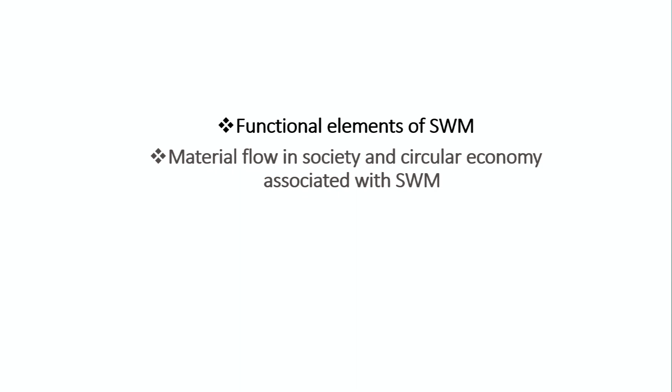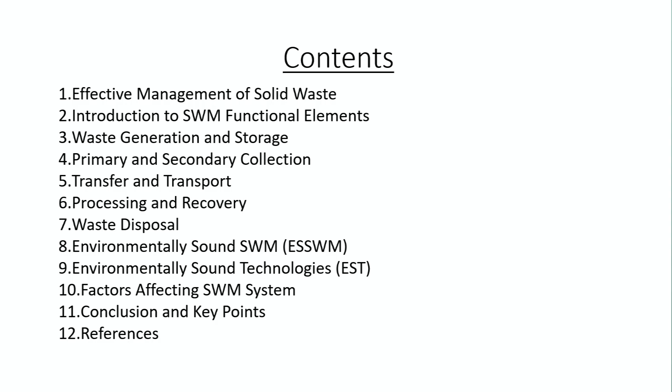Welcome to lecture 1 of week 3 of the SWM course. In week 3, I will cover two aspects: first, functional aspects and elements of solid waste management, and second, material flow in society and circular economy associated with solid waste management. In lecture 1, I will cover the functional aspect of solid waste management. These are the contents taken under this lecture.

First is effective management of solid waste. Effective solid waste management is needed to ensure better human health and safety. It must be safe for workers and safeguard public health by preventing the spread of diseases. In addition, an effective system of solid waste management must be both economically sound and sustainable. Environmentally sustainable means it must reduce as much as possible the environmental impact of waste management, and economically sound means it must operate at a cost acceptable to the community.

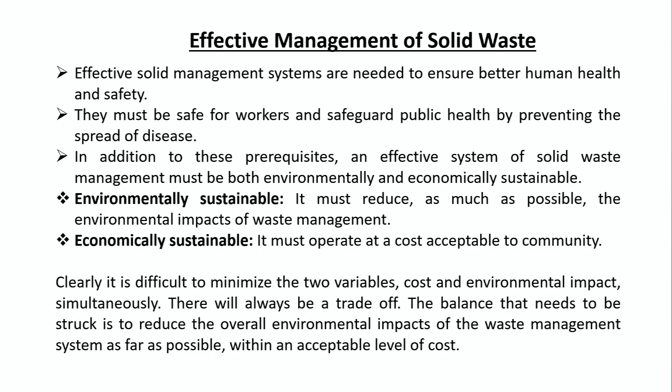Clearly, it is difficult to minimize the two variables, cost and environmental impact, simultaneously. There will always be a trade-off. The balance that needs to be struck is to reduce the overall environmental impact of the waste management system as far as possible with an acceptable level of cost. An economically and environmentally sustainable solid waste management system is effective if it follows an integrated approach, that is, it deals with all types of solid waste material and all sources of solid waste.

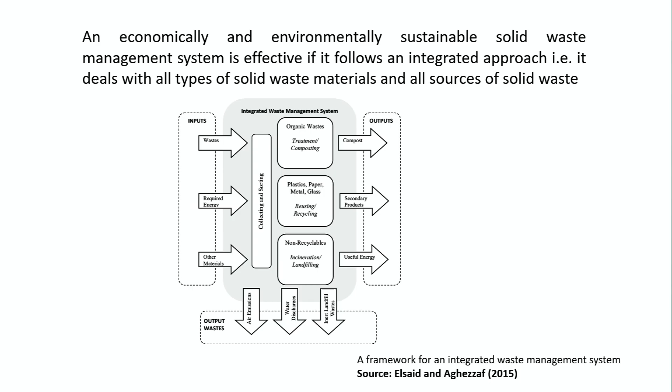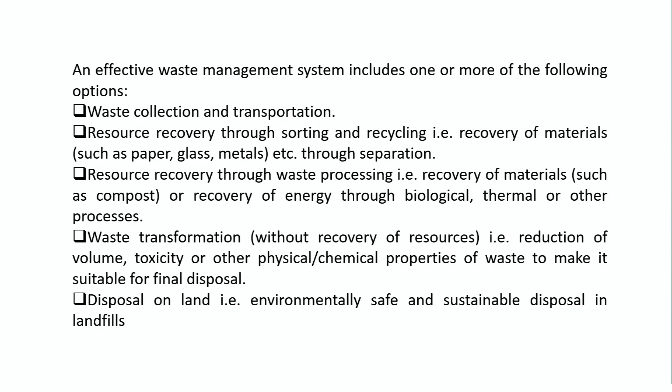An effective waste management system includes one or more of the following options: waste collection and transportation, resource recovery through sorting and recycling, through separation, resource recovery through waste processing - that is recovery of material or recovery of energy through biological, thermal or other processes - waste transformation, reduction of volume, toxicity or other physicochemical properties of waste to make it suitable for final disposal, and the last is disposal on land.

The waste management systems which are self-reliant and self-capable can sustain for long. This figure shows a representation of expected financial flow in a sustainable waste management system, where the output such as secondary products, compost and useful energy are generated, which result in revenue generation, and the input are fixed cost, operating cost or transportation cost. There is initial investment also involved as the input cost, and sometimes citizens pay for this collection or management of waste. So there should be a cycle so that whatever waste management system is followed should sustain for a long duration.

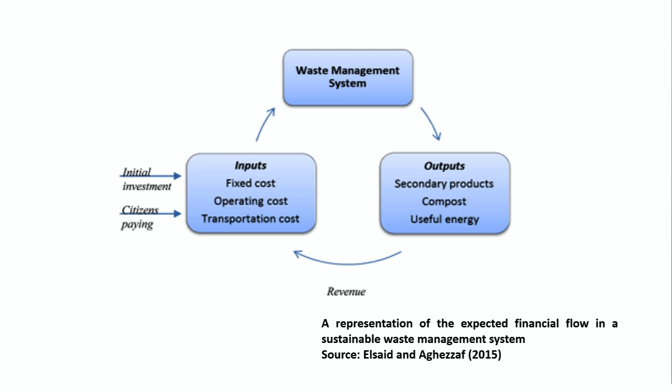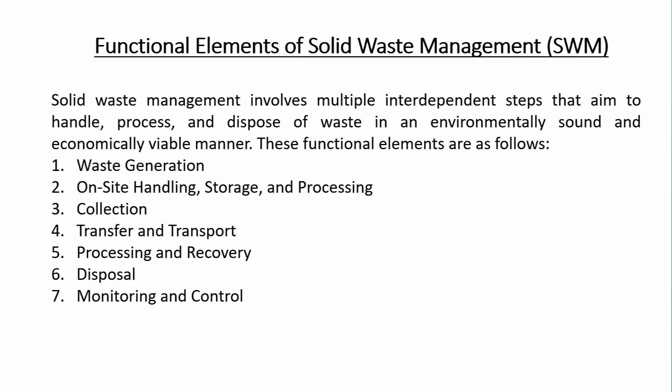Now, the functional elements of solid waste management. Solid waste management involves multiple interdependent steps that aim to handle, process and dispose of waste in an environmentally sound and economically viable manner. These functional elements are as follows: first is waste generation, second on-site handling, storage and processing, third is collection, fourth transfer and transport, processing and recovery, then disposal, and also the monitoring and control of the whole process is important.

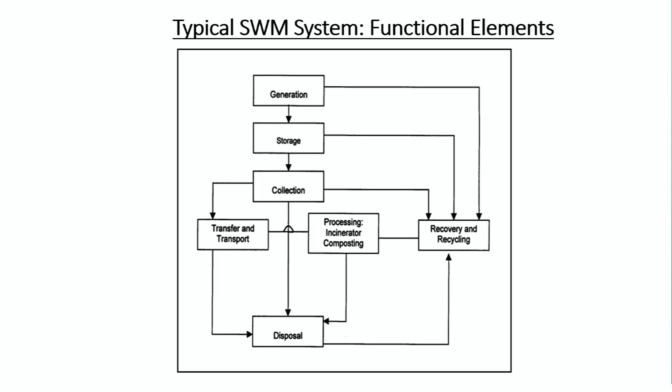This shows the flow diagram of a typical solid waste management system, function element wise. So there is generation; it may be either stored or sent to resource and recovery and recycling. Stored items are further collected to a secondary collection point, and from there it is either transported to a disposal point, or resource recovery and recycling is done. Then there is processing through incinerator or composting process, and whatever is leftover is finally disposed of. So there is an integrated approach.

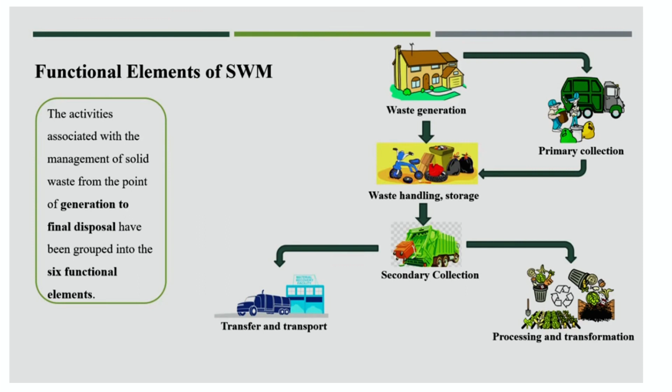The functional elements of solid waste management are pictured in this table. The activities associated with management of solid waste from the point of generation to final disposal have been grouped into 6 functional elements shown in this figure. First is waste generation. Waste is generated at the start of any process and thereafter at every stage as raw materials are converted into goods for consumption.

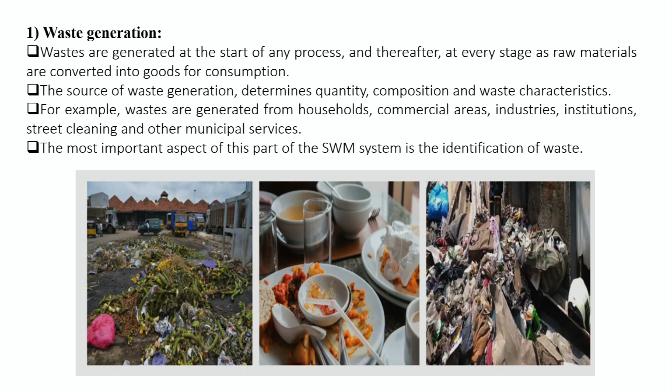The source of waste generation determines the quantity, composition and waste characteristics. For example, waste are generated from household, commercial outlets, industries, institutions, street sweeping or cleaning and other municipal services. The most important aspect of this part of solid waste management system is the identification of the waste.

Next is waste storage. Storage is a key functional element because collection of waste never takes place at the source or at the time of their generation. The heterogeneous nature of waste generated in the residential area must be removed within 8 days due to shortage of storage space and presence of biodegradable material in the waste.

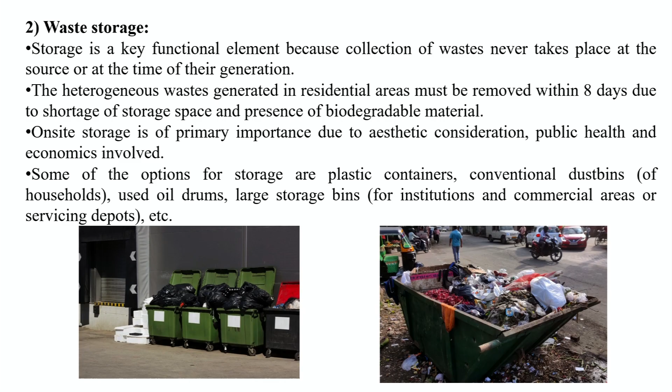On-site storage is of primary importance due to aesthetic considerations, public health and economics involved in it. Some of the options for storage are plastic containers, conventional dustbins, used oil drums, large storage bins, etc. These are pictures of different types of containers.

There are two types of collection generally: first is primary collection and second is secondary collection. Primary collection includes the gathering of solid waste and recyclable material from the source of generation - houses, offices, apartments, shopping centers, etc. Primary collection of solid waste includes collection from house to house, either by door-to-door collection, and disposed in containers kept at ward corners.

The secondary collection is the collection of solid waste from primary container locations to processing facility or disposal site. In secondary collection, curbside container solid waste is transported using larger size containers to a disposal facility or for further treatment.

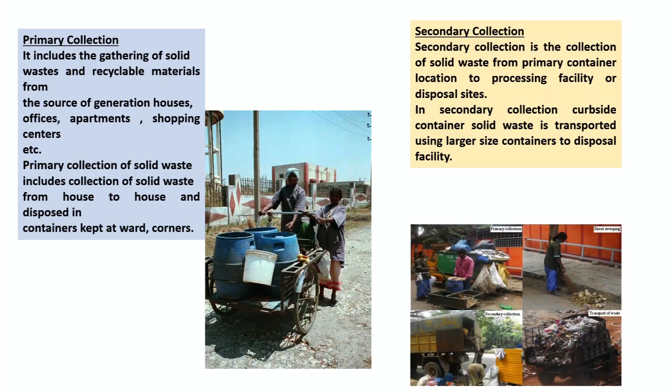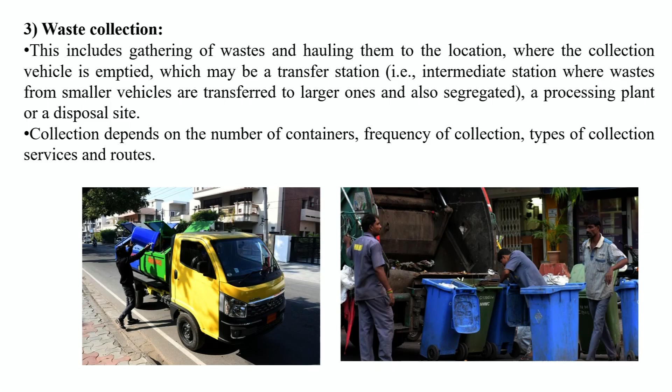Waste collection includes gathering of waste and hauling them to the location where the collection vehicle is emptied, which may be a transfer station, a processing plant, or the disposal site. Collection depends on number of containers, frequency of collection, type of collection services and routes.

Next is transfer and transport. This functional element involves the transfer of waste from a smaller collection vehicle, where necessary to overcome the problem of narrow access lanes, to a larger one at transfer stations.

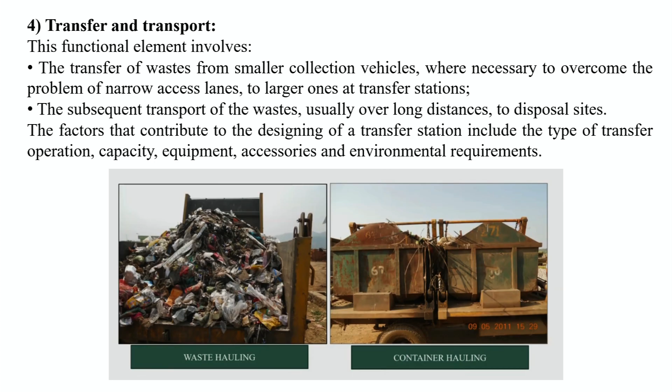The subsequent transport of waste, usually over long distances, to disposal sites. The factors that contribute to designing a transfer station include the type of transfer operations, capacity, equipment, accessories and environmental requirement. Next is processing.

Processing is required to alter the physicochemical characteristics of waste for energy and resource recovery and recycling. The important processing techniques include compaction, thermal volume reduction, manual separation of waste components, incineration and composting.

The next one is resource recovery and recycling. This includes various techniques, equipment and facilities used to improve both the efficiency of the disposal system and recovery of usable material and energy. Recovery involves the separation of valuable resources from the mixed solid waste delivered at the transfer station or processing plants.

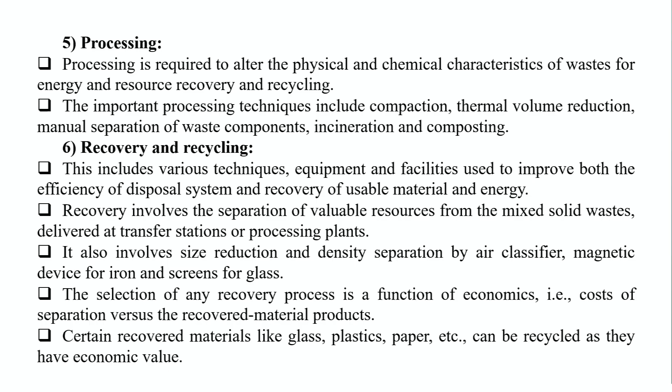It also involves size reduction and density separation by air classifier, magnetic devices for iron, and screens for glass. The selection of any recovery process is a function of economics, cost of separation versus the recovered material product. Certain recovered materials like glass, plastic, paper, etc. can be recycled as they have their own economic value.

Next is waste disposal. Disposal is the ultimate fate of all solid waste, be they residential, semi-solid from the municipal and industrial treatment plants, incinerator residues, compost or other substances that have no further use to the society. Thus, land use planning becomes a primary determinant in the selection, design and operation of landfill operation.

A modern sanitary landfill is a method of disposing solid waste without creating nuisance and hazards to public health. Generally, engineering principles are followed to confine the waste to the smallest possible area, reduce it to the lowest practical volume by compaction at the site, and cover it after each day's operation to reduce exposure to vermin.

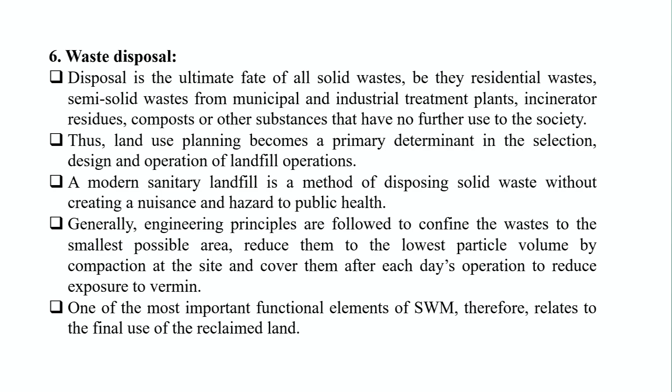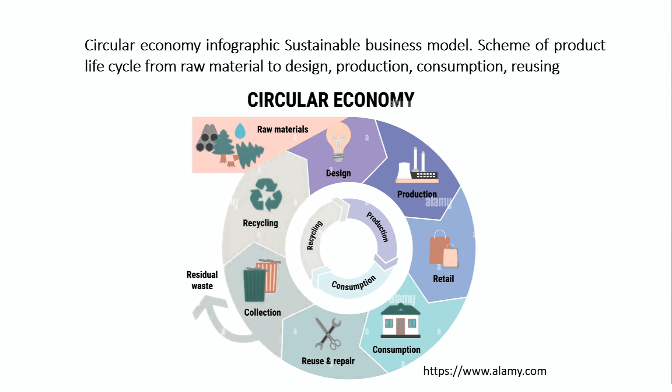One of the most important functional elements of solid waste management therefore relates to the final use of reclaimed land. This figure shows the circular economy infographic of a sustainable business model - a scheme of product life cycle from raw material to design, production, consumption and reusing.

Now, environmentally sound solid waste management.

The fundamental principles of environmentally sound sustainable waste management take into account economic and social issues along with environmental impact considerations. These include: ensuring sustainable development of the ecosystem and human environment, minimizing the impact of human activity on the environment, maximizing ecosystem carrying capacities, and ensuring implementation of environmentally sound solid waste management through environmentally sound technologies.

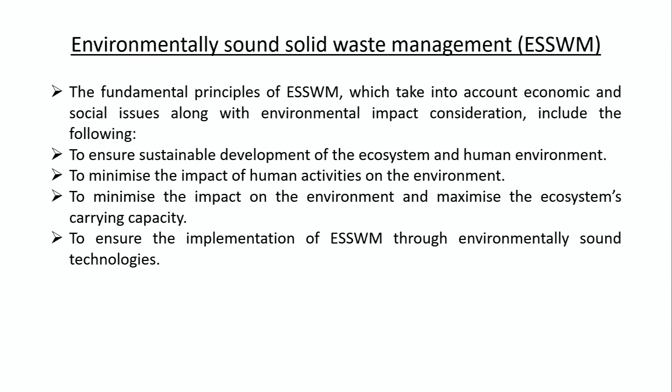Environmentally sound technologies refer to cost-effective and energy-efficient technologies which generally perform better on the environment, as they do not pollute air, land or water, and consider the reuse, recycling or recovery of waste. EST can be characterized broadly into two categories: hard EST and soft EST.

Hard EST includes equipment, machines and other infrastructure with their material accessories to handle waste products and monitor or measure the quality of air, water and soil. Soft EST supports and complements hard technologies and includes nature-based technologies and management tools. Nature-based technology includes processes and mechanisms nature uses within a specific ecosystem and its carrying capacity, while management tools include systems and procedures, policy and regulatory frameworks, and environmental performance standards and guidelines.

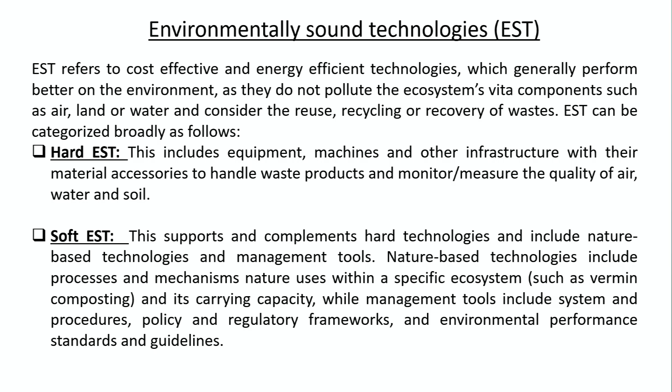EST is selected based on the following generic criteria, which may vary depending on the region in which they are implemented. First is affordability, meaning low investment, reasonableness, maintenance-free operation and durability. Second is validity, referring to effectiveness and easy operation and maintenance. Next is sustainability, meaning low impact, energy saving and cultural acceptability.

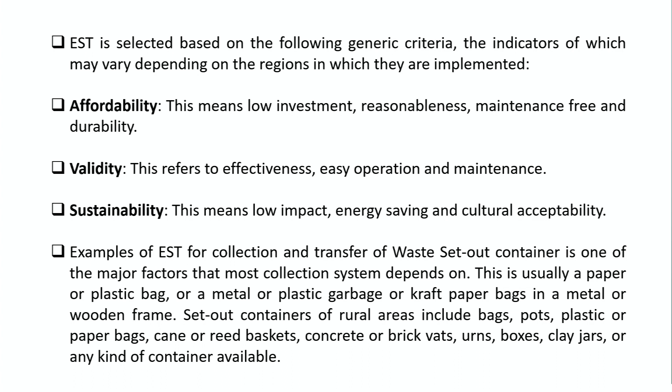Examples of EST for collection and transfer of waste: set-out containers are one of the major factors that most collection systems depend on. This is usually a paper or plastic bag, metal or plastic garbage can, or kraft paper bags in a metal or wooden frame. Set-out containers in rural areas include bags, pots, plastic or paper bags, cane or reed baskets, concrete or brick vats, urns, boxes, clay jars, or any kind of container available.

Non-compactor trucks are more efficient and cost-effective than compactor trucks in small cities and areas where waste tends to be very dense and have little potential for compaction. The use of lighter, more energy-efficient box trucks, vans and dump trucks can be appropriate for sparsely populated areas where the main constraint on collection efficiency is distance.

Transfer trailers or compacting vehicles can carry a larger volume of municipal solid waste than regular collection trucks, which allows them to travel long distances carrying more waste. This results in lower fuel costs, increases labor productivity, and saves on vehicle wear.

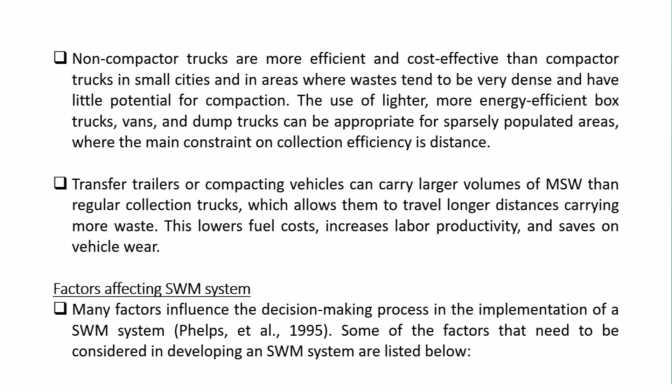Now, the factors affecting solid waste management systems. Many factors influence the decision-making process in implementing a solid waste management system. Some of the factors that need to be considered in developing a solid waste management system are listed below. First is quantities and characteristics of waste.

Quantities of waste generated generally depend on the income level of a family, as higher income categories tend to generate larger quantities of waste compared to low income categories. The quantity ranges from 0.25 to about 2.3 kg per person per day, indicating a strong correlation between waste production and per capita income. One measure of waste composition is density, which ranges from 150 kg per cubic meter to 600 kg per cubic meter.

The proportion of paper and packaging material in the waste largely accounts for differences in density. When the proportion is high, the density is low, and vice versa. Waste of high density reflects a relatively high proportion of organic matter and moisture, and a low level of recycling.

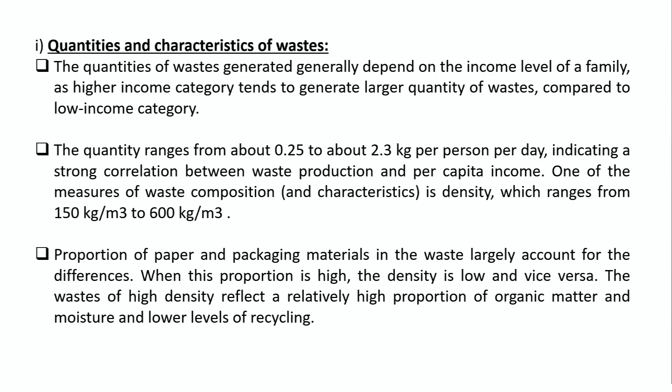Next is climate and seasonal variations. There are regions in the extreme north and south where temperatures are very low for much of the year. In cold climates, drifting snow and frozen ground interfere with landfill operations, so trenches must be dug in summer and cover material stockpiled for winter use.

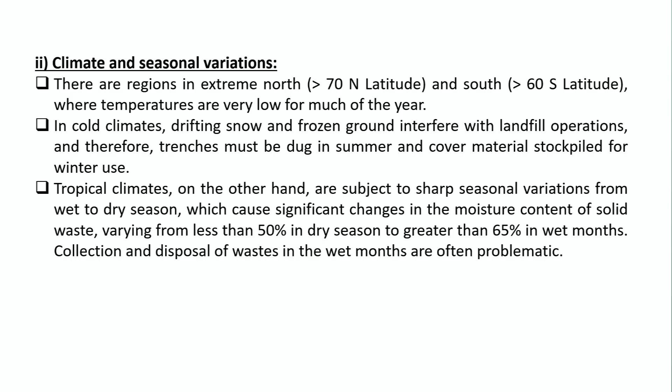Tropical climates, on the other hand, are subject to sharp seasonal variation from wet to dry season, which causes significant changes in the moisture content of solid waste, varying from less than 50% in the dry season to greater than 65% in the wet months. Collection and disposal of waste in the wet months are often problematic due to the humid climate.

High temperature and humidity cause solid waste to decompose far more rapidly than in cold climates due to moisture content as well as microbial activity. The frequency of waste collection in high temperature and humid climates should therefore be higher than in cold climates.

In subtropical or desert climate, there is no significant variation in moisture content of the waste due to low rainfall, and low production of leachate from sanitary landfill is expected. High winds and wind-blown sand and dust, however, cause special problems at landfill sites, while temperature inversion can cause airborne pollutants to be trapped near ground level, and landfill sites can affect groundwater by altering the thermal property of the soil.

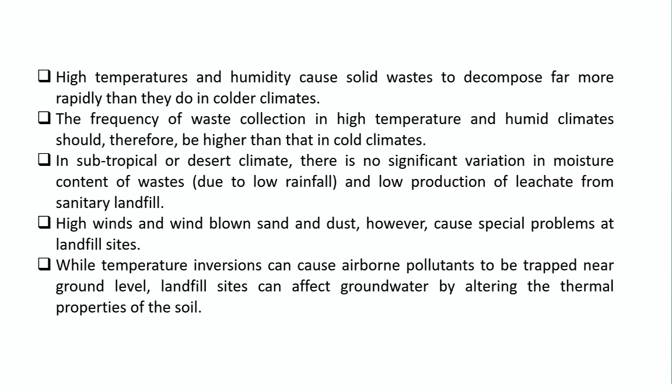Physical characteristics of an urban area. In urban areas where the layout of streets and houses allows vehicle access, door-to-door collection of solid waste is the accepted norm, either by large compaction vehicles or smaller vehicles.

Added to this is the problem of urban sprawl in the outskirts where population is growing at an alarming rate. Access ways are very narrow, unpaved and tortuous, and therefore not accessible to collection vehicles. Problems of solid waste storage and collection are most acute in such areas.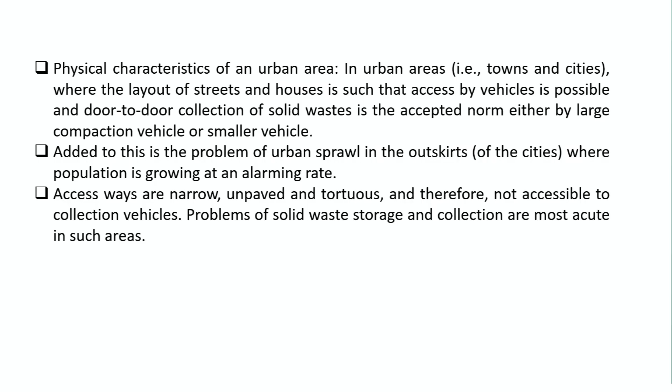Next is financial and foreign exchange constraint. Solid waste management accounts for a sizable proportion of the budget of municipal corporations. This is allocated for capital resources which go toward the purchase of equipment, vehicles and fuel, as well as labor cost. Typically 10 to 40% of revenues of municipalities are allocated to solid waste management.

In regions where wage rates are low, the aim is to optimize vehicle productivity. The unfavorable financial situation of some countries hinders the purchase of equipment and vehicles, and this situation is further worsened by the acute shortage of foreign exchange. This means that the balance between the degree of mechanization and size of the labor force becomes a critical issue in arriving at the most cost-effective solution.

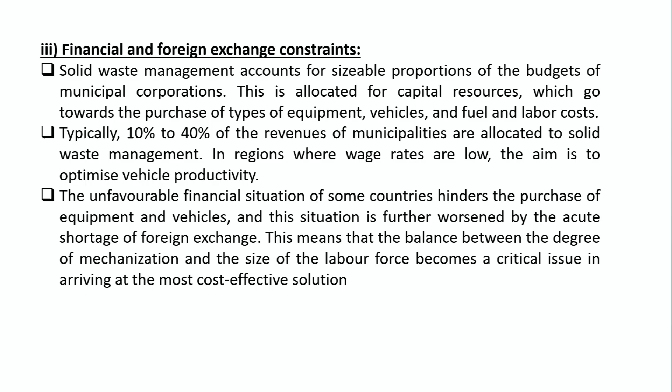In addition, as discussed in the first week, there is political intervention where the urban local bodies are made responsible for the collection and disposal or treatment of waste, and the fund is given by the state government. If the government at the urban local bodies is ruled by the same party as the state government, then there is no problem. Otherwise, there is a tussle between the urban local bodies and the state government. An example is the earlier government of AAP and the municipal corporation ruled by the Bharatiya Janata Party.

The fourth constraint is the cultural constraint. In some regions, long-standing tradition precludes the intrusion of waste collection on the precincts of households, and therefore influences the collection system. In others, where the tradition of castes persists, recruitment to the labor force for street cleaning and handling of waste must be drawn from certain sections of the population, while others will not consent to place storage in their immediate vicinity. Social norms of the community more often than not override what many may consider a rational solution.

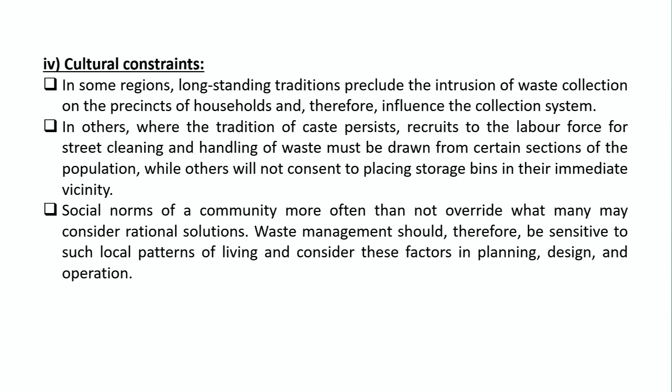Waste management should therefore be sensitive to such local patterns of living and consider these factors in planning, design and operation. Management and technical resources.

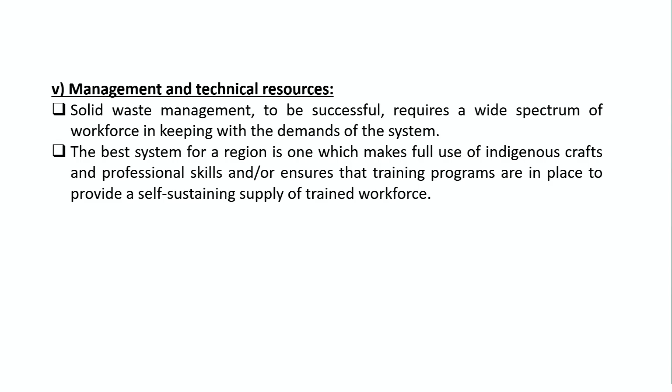Solid waste management, for being successful, requires a wide spectrum of workforce in keeping with the demand of the system. The best system for a region is one which makes full use of indigenous craft and professional skill, and ensures that training programs are in place to provide a self-sustaining supply of trained workforce.

This slide shows the urban situation in nine major cities, where Delhi produced garbage generated of 3,880 tons, whereas garbage cleared is 2,420 tons, and annual budget is 1,016 crore. For Surat, garbage generation is 1,250 tons per day, garbage cleared is 1,000 tons, whereas the annual budget is 170 crore.

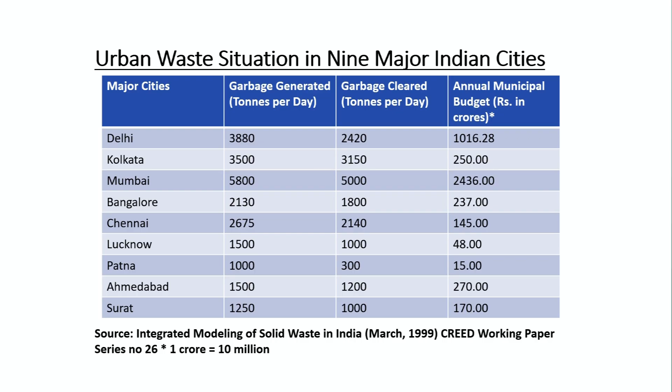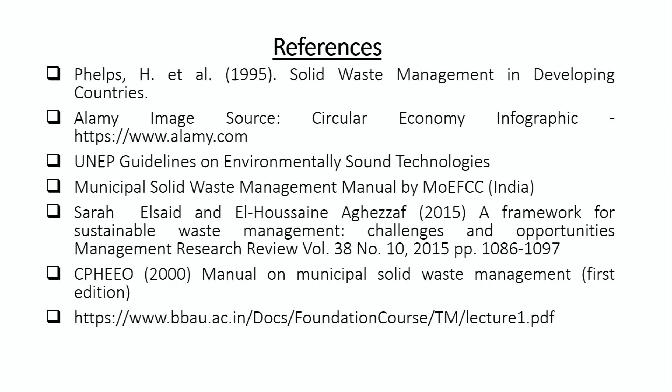These are the references used in this presentation. So in lecture 1, I dealt with integrated solid waste management and the constraints with solid waste management. In the next part, I will carry on the same topic and another aspect of waste management. Thank you, till then.